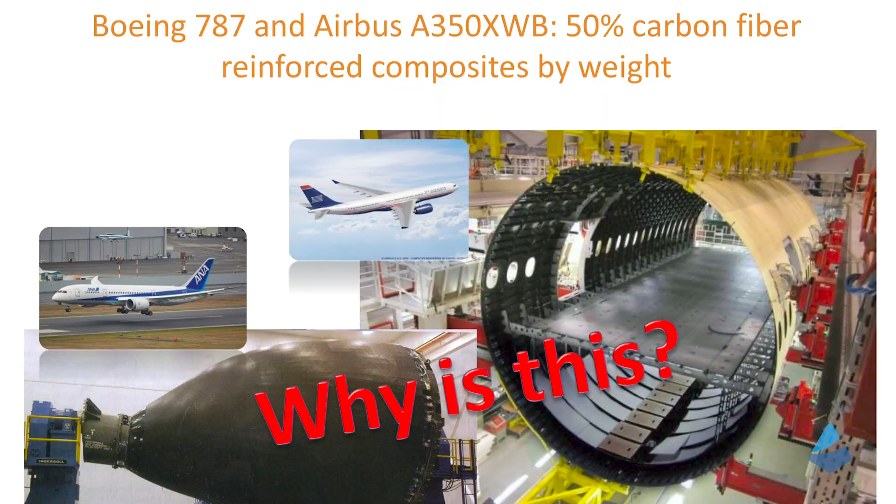Then looking at composites, we see the 787, A350 XWB, 50% composites by weight on the structure. The nose and the fuselage, the wings, the tails, they're all black these days. And why is this? Air traffic is increasing all the time. The projections today are still, in the next 20 years, travel will double, unless, of course, we are slowed down by the climate change situation.

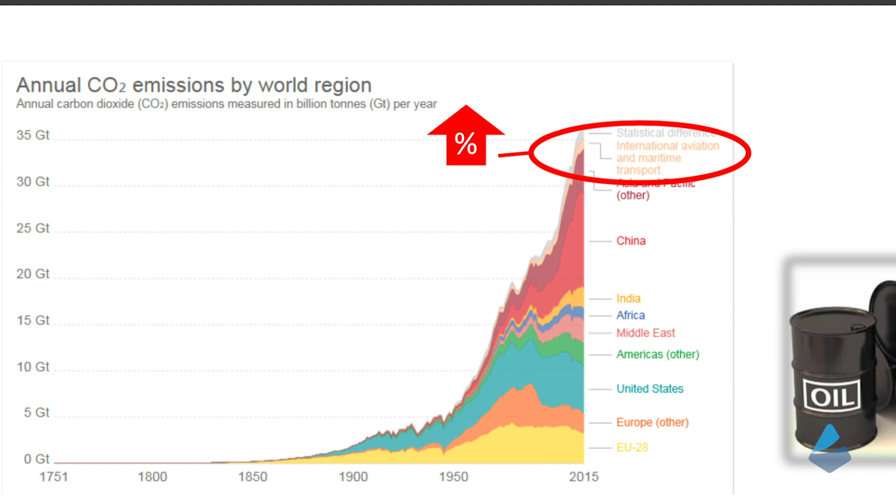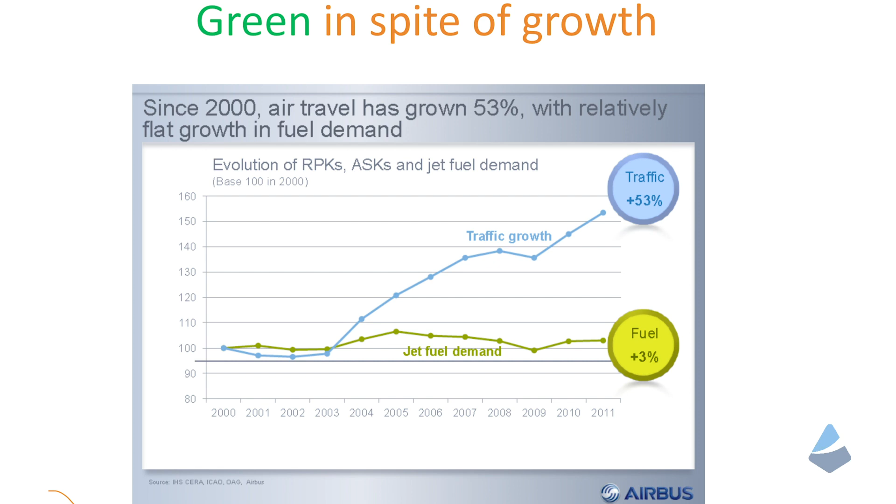This graph, it's a bit difficult to read, but at the top, there is a contribution of aerospace, which is just a few percent to the CO2 emissions, but it is becoming bigger percentage-wise. And this is a graph of some years ago of Airbus showing that even though the amount of miles being flown by people is increasing all the time, the jet fuel demand, that's the green line, is more or less horizontal. It's constant. And there's a reason for this, and the reason is the engines. The engines are becoming ever more efficient and larger.

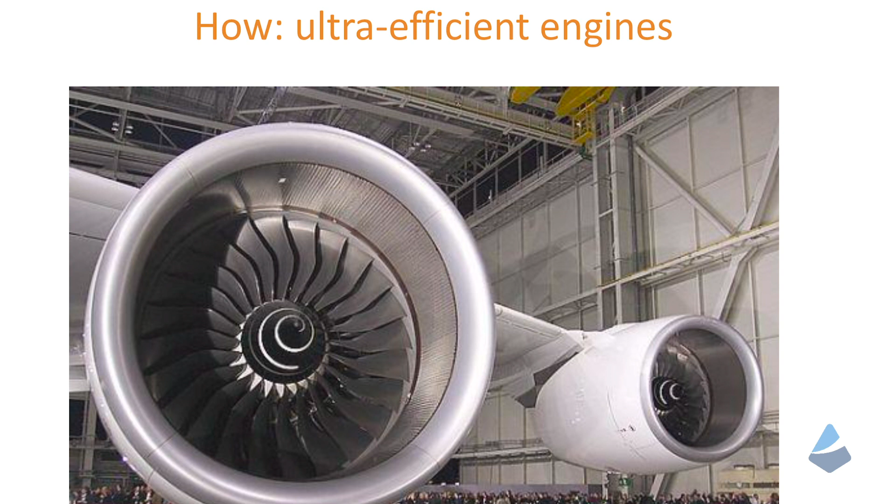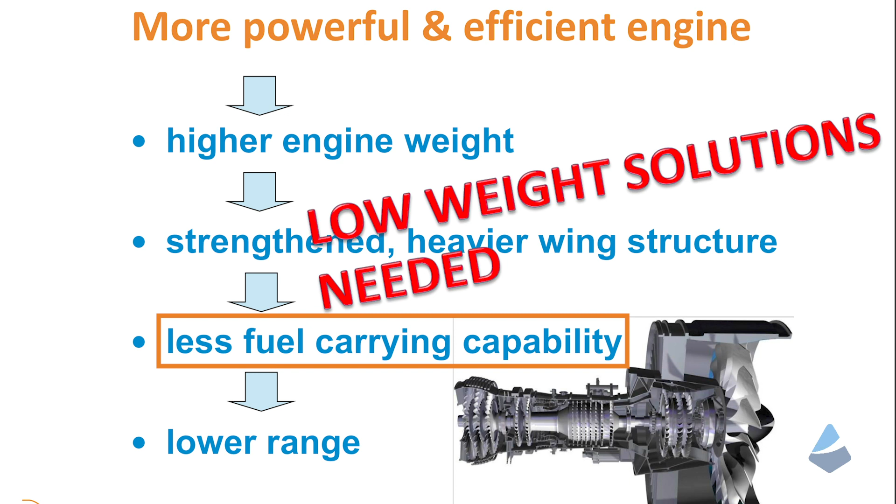And here's the engines for the Neo, for example. So very, very efficient engines. And what does this mean? So if you have these efficient engines, the weight of the engine will tend to increase. Also, the wing will have to be reinforced to compensate for this. You'll be able to carry less fuel, and you'll reduce the range of your aircraft. So even though the engines are the big increase in performance, there is a drawback, and we need to compensate. And one of the ways to compensate is to reduce the weight of the rest of the aircraft.

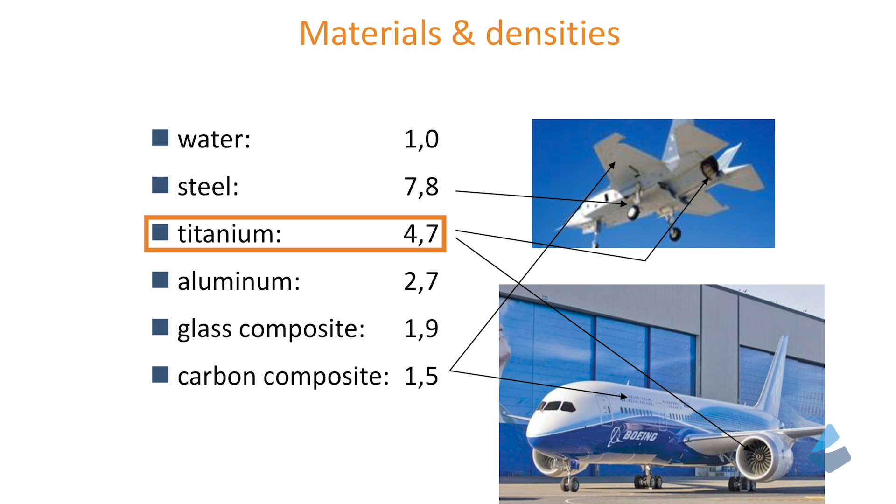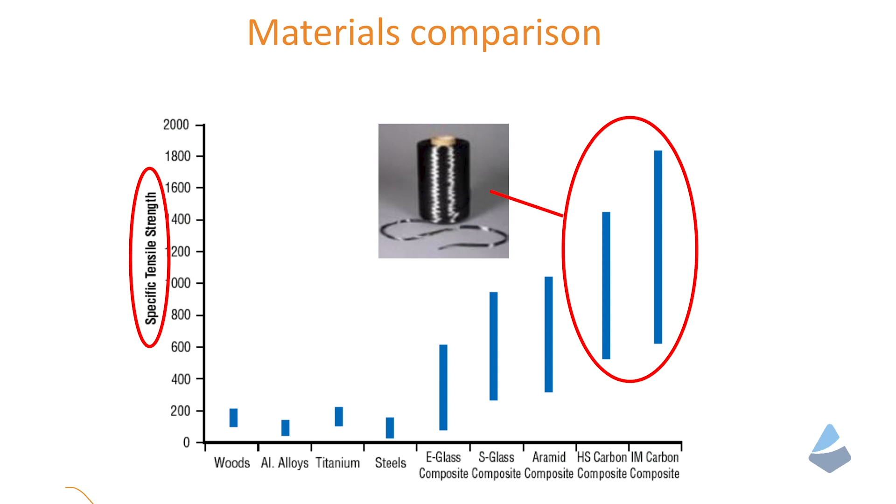So if we look at different materials, we have density comparison. Water for reference, reference number 1. Then steel, 7.8, heavy material used in landing gears. Titanium, 4.7, used in engines, but also in combination with carbon products on the newer aircraft. Then we have aluminum, 2.7, glass composite, 1.9, and then carbon composite, 1.5. So it's a very low weight material. And then if we look at the strength divided by weight, specific strength, we really see why the carbon fiber reinforced materials excel.

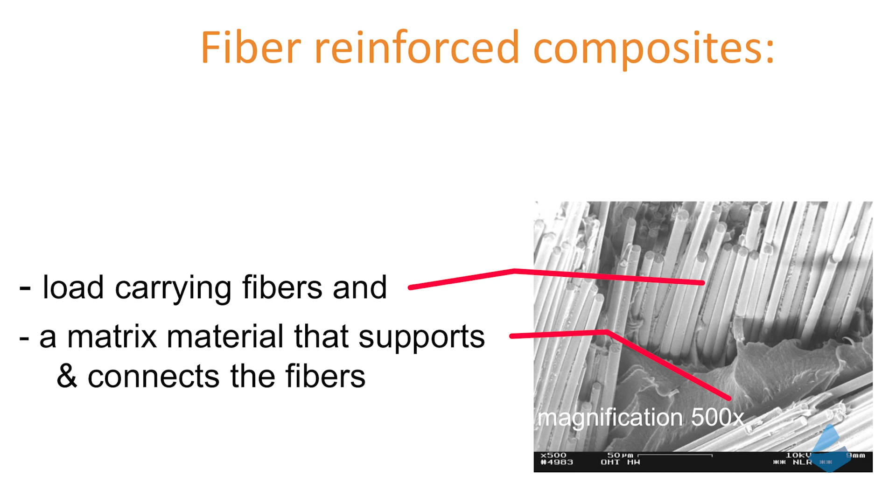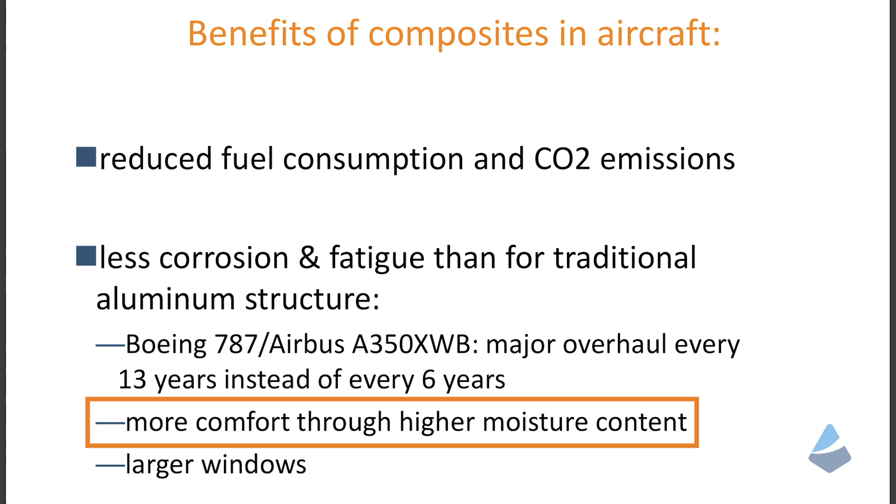Now most of you are probably aware of carbon being a good fiber. And we have the composites. Composites are a load-carrying fiber and a matrix, polymeric material holding the fibers together. And the benefits of composites: reduced fuel consumption and CO2 emissions, but also less corrosion and fatigue than for traditional materials like aluminum. So the major overhaul is at a much larger interval, roughly double the interval than it was before. And there is more comfort in the fuselage. You have a higher pressure, a higher moisture content, so for the passengers, it is a more positive experience, and larger windows as well.

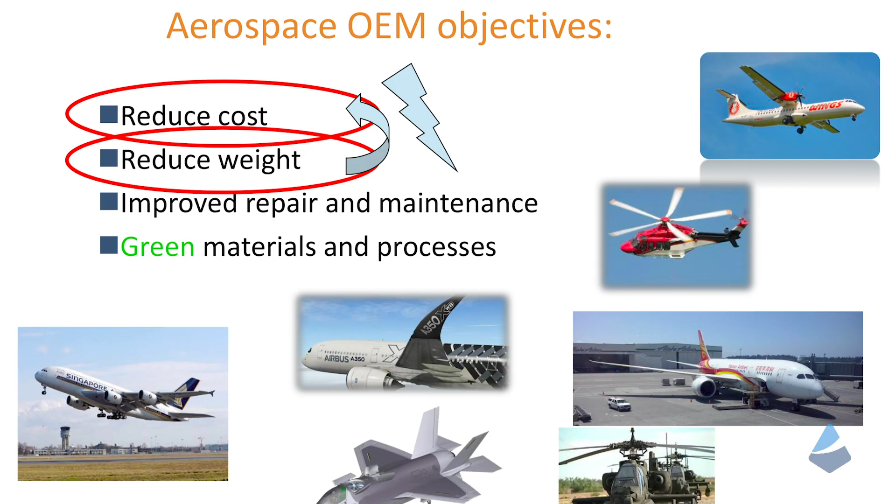So to summarize, the aerospace original equipment manufacturers have several targets. And an important one these days is to reduce cost, to keep cost of flying feasible. At the same time, we do want to reduce weight. Everybody's talking about cost, but certainly if we want to reduce the CO2 emissions, we will have to reduce weight. And the problem often is with composites that these two requirements are conflicting. If you reduce cost, you increase weight. If you reduce weight, you increase cost. And the challenge is, can we find technologies, designs, where we can reduce both preferably?

And that's a challenge. This aircraft, it's a Gulfstream 5 aircraft, developed in the 1990s, so it's not new. But at the time, we were developing a tail for this aircraft and the floor panels. The tail was largely in metal. The floors were in composite. And one of our engineers had an idea to reduce the cost of this tail, specifically the trailing edge of the rudder. He had an idea to fold a thermoplastic material instead of laminating it and putting it in an autoclave like we used to do, to take a sheet of thermoplastic and fold it into a product. He started with a lighter behind his desk, just folding, playing around. And then my boss showed it to Gulfstream, they liked it, and it became a real product.

We're gonna heat this material and show it's safe. It doesn't really smoke and burn, but it'll get soft in the middle. And when it gets soft, I'm gonna bend it, and simulate a production step that we do in our factory. It takes some time. There it is, it's getting soft. So, there, and then it cools down. And when it's more or less cold, it's solid and stiff again. And this symbolizes the trailing edge of a rudder on a Gulfstream aircraft, which we make in a 7-foot length with a machine, but it's basically the same idea.

But what we do in the factory is this. It's a Toray product, sheet of material, like the material you have. It's several plies of prepreg. This is a single layer of thermoplastic prepreg. It's a carbon fabric with thermoplastic on both sides. And several layers, like 3 layers, are stacked and pressed together to make a nice laminate. So we're heating a straight line, 2 meters in length, like 7 feet, and then very quickly fold it over. And then you're finished. So you need a folding machine with hot elements, and you push a little bit on the tip to make it nice and smooth.

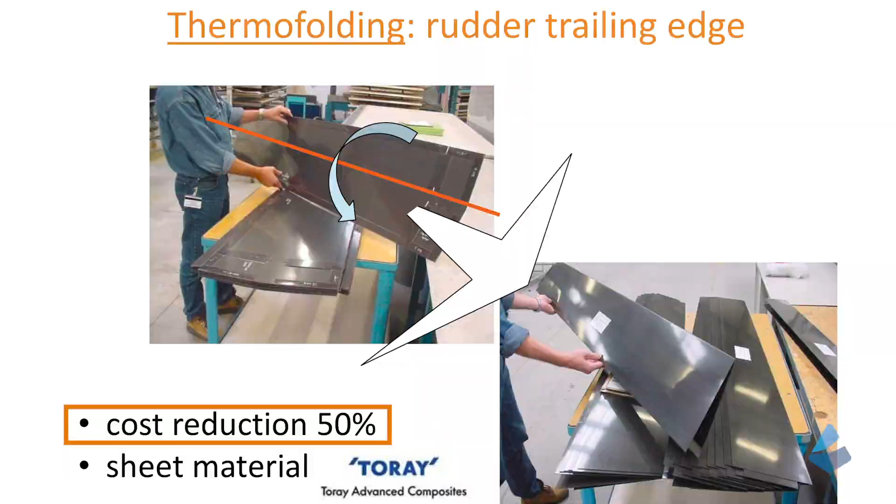And the cost is 50% of what we did before. Before we bought prepreg, we were laminating on a tool, we were autoclaving the product. And here you buy a sheet of material with added value and then very quickly make the shape. So it's about cost reduction. The quality of this folding is not so good. You can see in your little specimen, the fibers are all crumpled up. But for a trailing edge of a rudder, a secondary part, it can be acceptable. It's just an example of what you can do with thermoplastics.